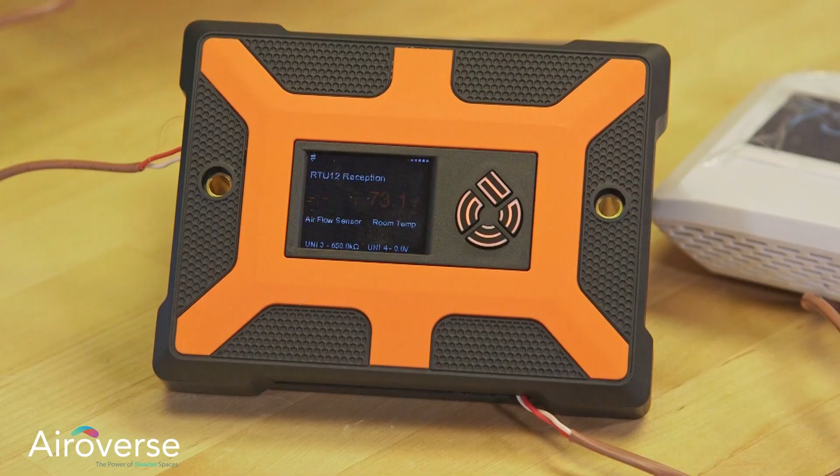So that's the Connect module. So you can test everything up on the roof before you go down in the space to check that the HyperSplit is powered up and get it paired up. So we're going to switch out here and we're going to move this over.

All right, so when we come down to the space, I've taken the corner off of this to make it more obvious, but there is a film on the front of every one of these HyperSplits or HyperStats, and it covers the full face of the stat. So if you put your finger there, when you're fully done with the install, you can peel all this film away, and it gives you a much nicer, cleaner look at the end of your install. And there's also a film on the touch slider here too. Some people leave that for a while until it starts to wear out, and it saves the touch slider a little bit longer.

Once I come in here, I've got a default screen that's showing me a few things. I've got a slider here that I can adjust up and down my desired temps. And it'll time out here in just a second, go back to the home screen. And I can also change my modes. So the fan mode button is really a fan and mode button. So I can change to auto mode, heat only, cool only directly from the stat. That can be locked out from the stat or in various ways.

And then what we're going to do is we're going to enter the installer menu operation by holding the plus and minus buttons for about 4 seconds. And from here, I can also see the inputs coming from this device, so I can make sure all my sensors are reading, that the paint didn't clog something up or something like that.

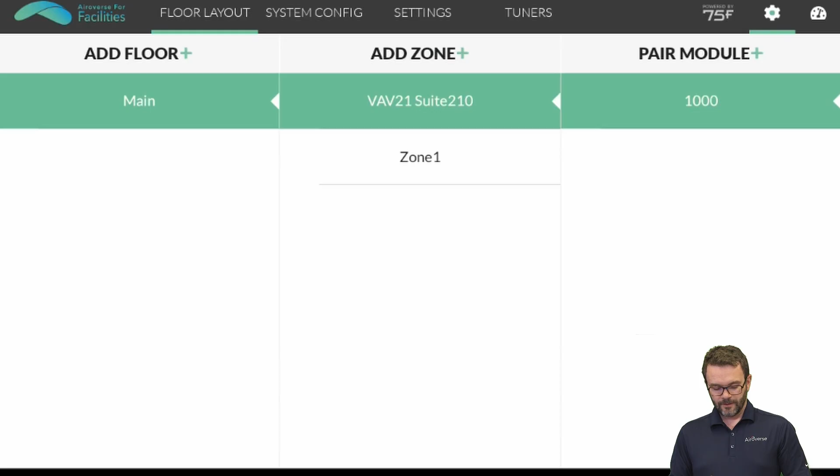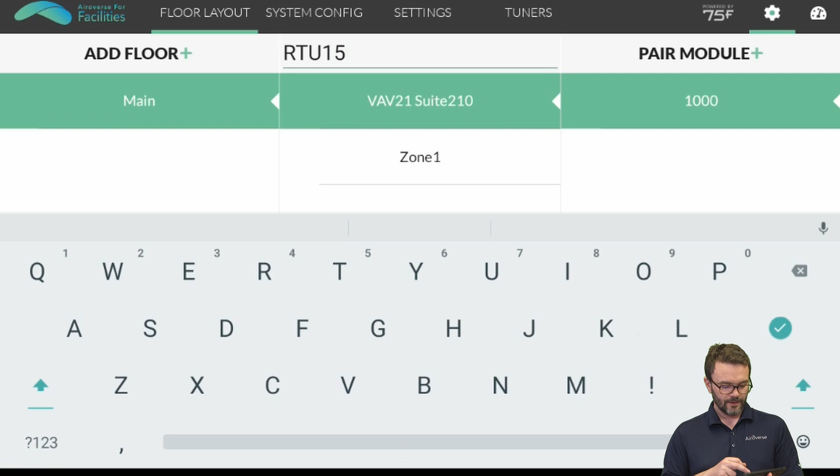So, back on the central control unit, I'm going to go ahead and add a new zone for this HyperStat Split, and I'm going to call it the reception area. So if it's in the reception area, I also want to call it which RTU it's controlling. So I'm going to say it's RTU 15, and we'll call it reception. Again, if you get in that naming convention habit, it'll save you a lot of time on the back end.

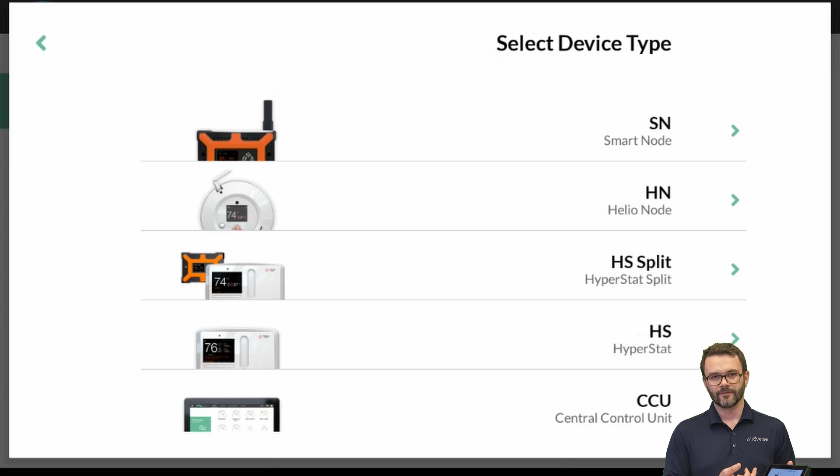And then what we're going to do is we're going to hit pair. And again, we're going to select which device we want to pair. We're pairing a HyperStat Split. There's only one major profile for the HyperStat Split right now, for conventional package unit with economizer. You can disable the economizer function if you want. And from here, it walks you through the steps to put the HyperSplit into pairing mode.

One thing I haven't mentioned yet is that the HyperSplit actually has the 900 megahertz antenna, so the antenna is down in the space. It's not up on the Connect module in the roof. So that makes your communication much more stable.

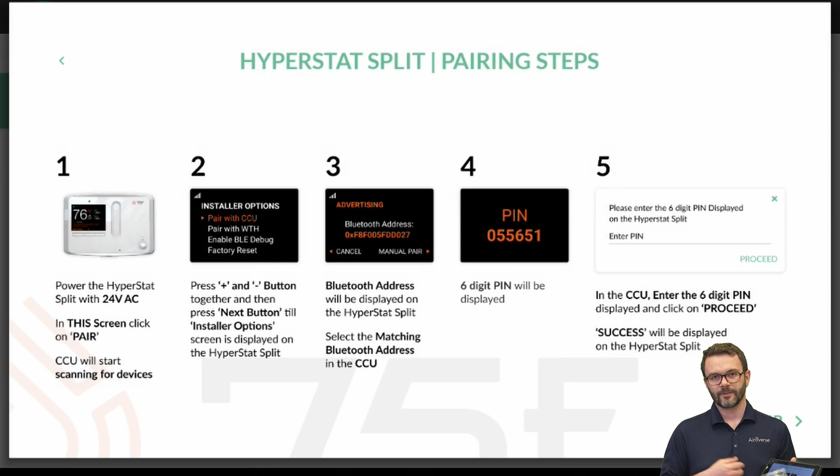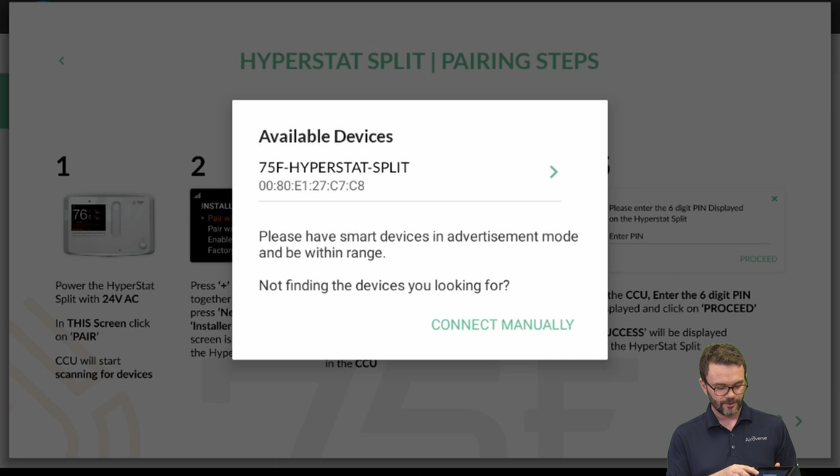So we'll go ahead and hit pair, and we're going to want to verify that our MAC address is C8. C8 it is. Don't choose connect manually. Connect manually is as if I'm trying to swap out devices without pairing. And then what we're going to do is type in the code. The 6-digit code verifies I chose the right one, 974701, and I hit pair. And just like that, I've successfully paired with the central control unit.

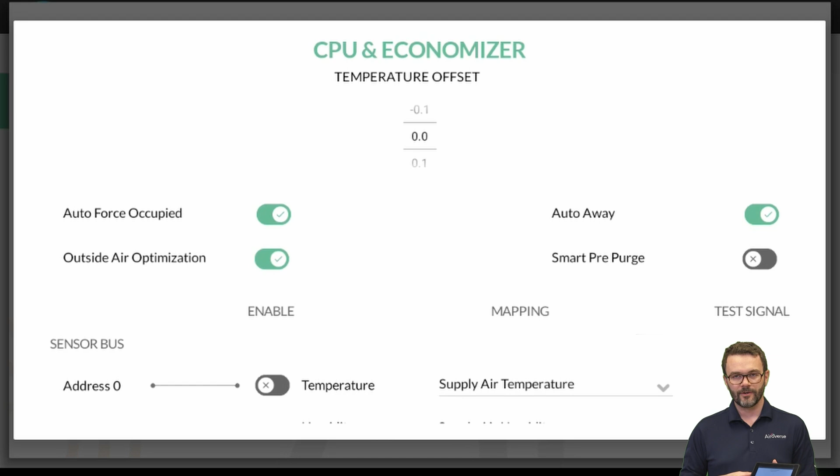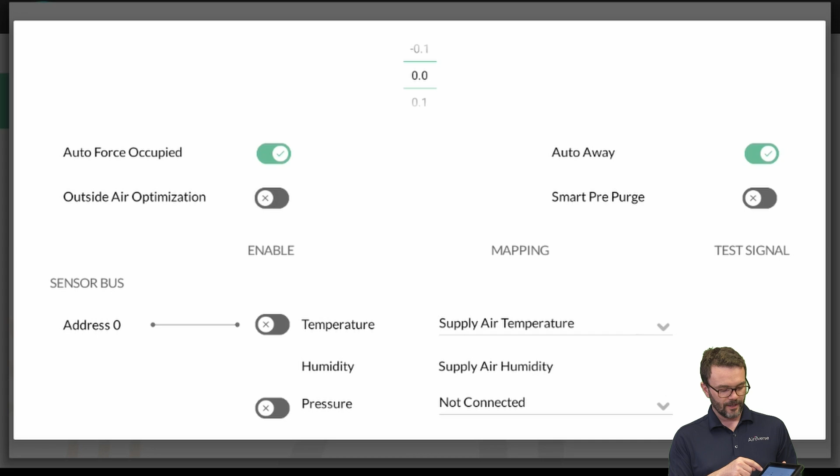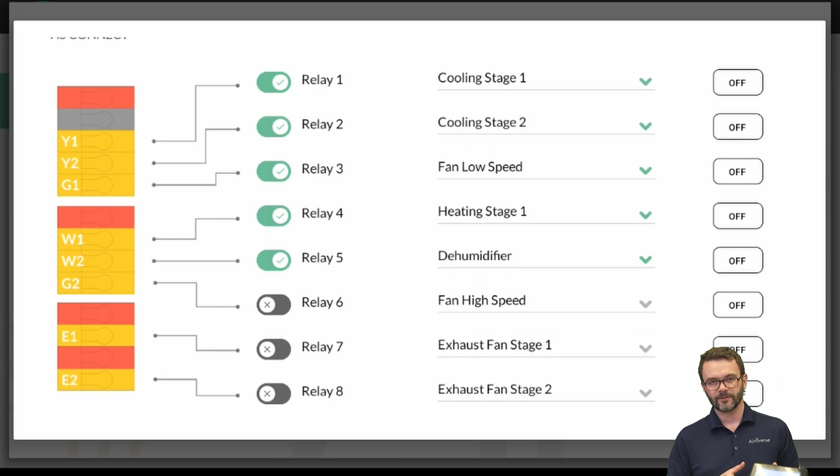And now what I do is I just select my options. So I can choose if I want to use the occupancy sensor. I can turn on and off my outside air optimization, which is the economizer function. I can scroll down, I can turn on sensor bus options, I can turn on which stages of equipment I'm going to control on the unit. I can change which stages of equipment, or if I want to use a dehumidifier on Relay 5, I can turn it into a dehumidifier using the onboard humidity value from the HyperSplit.

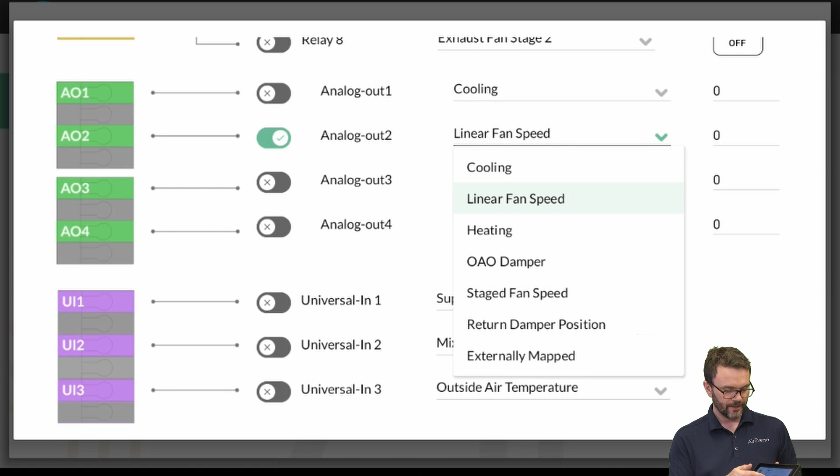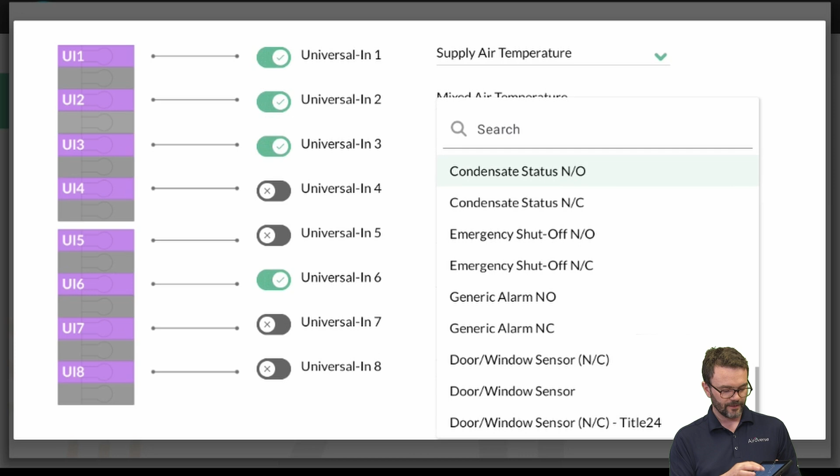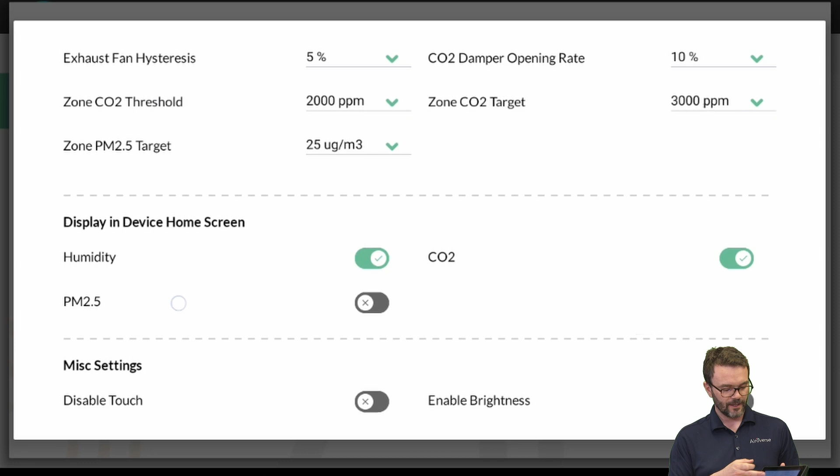If I want to do a staged VFD fan on here, linear fan speed would just scale with the load. I want to do it based on a staged fan speed like so. Scroll down, I can turn on some of my universal inputs, or I could reconfigure some of those inputs to be something like a generic alarm from something in the unit. Scroll down, there's more settings for how I control my VFD fan and other things. Again, you'll make yourself familiar with this as you go. But primarily the default options are going to work.

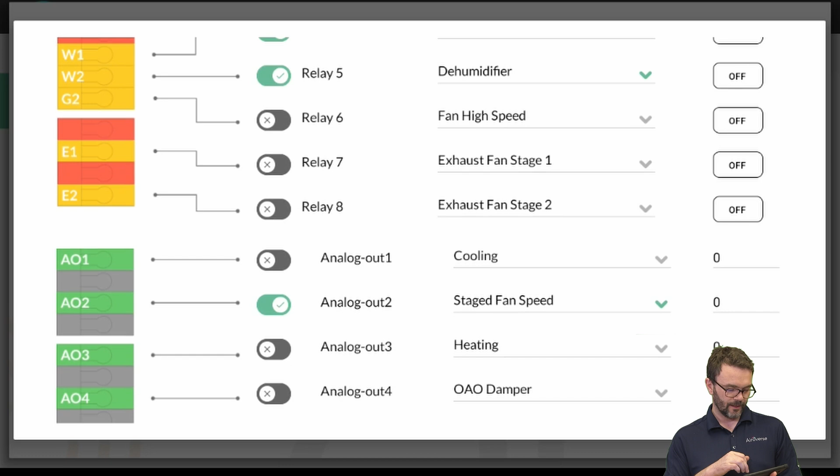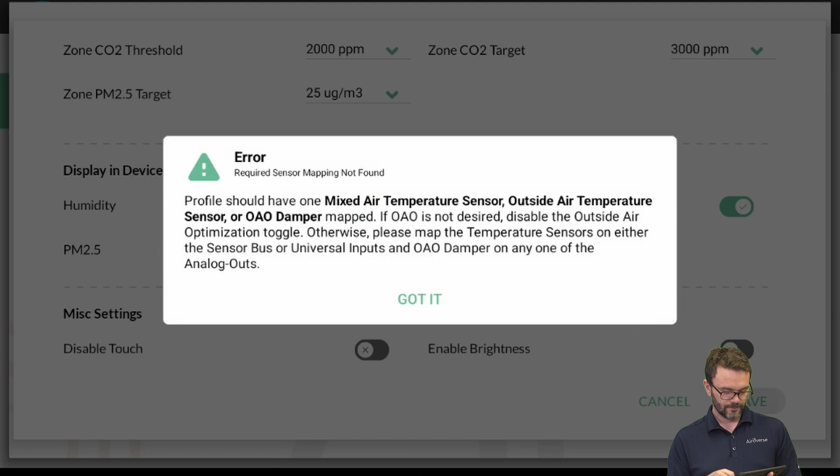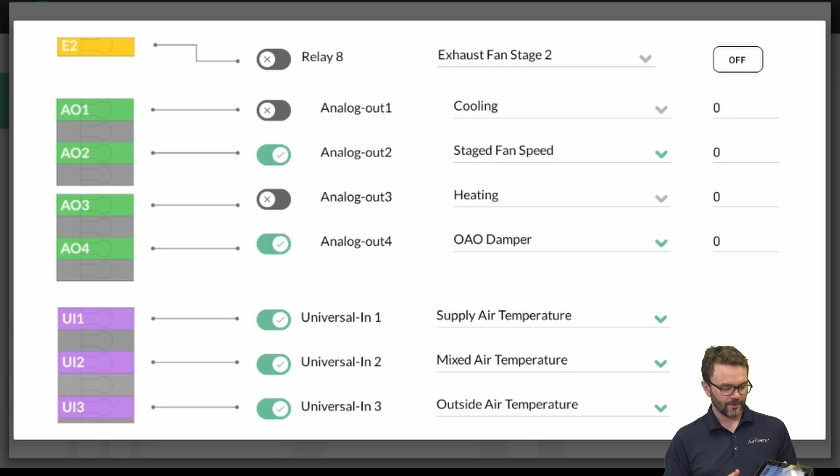Oops, and I enabled my OAO, which means I have to have a mixed air temp, which I had. I have to have my outside air damper, so it was letting me know I have an economizer enabled without my OAO damper. So that's important. That was a good catch by the software. And we hit save, and now it's assigned an address.

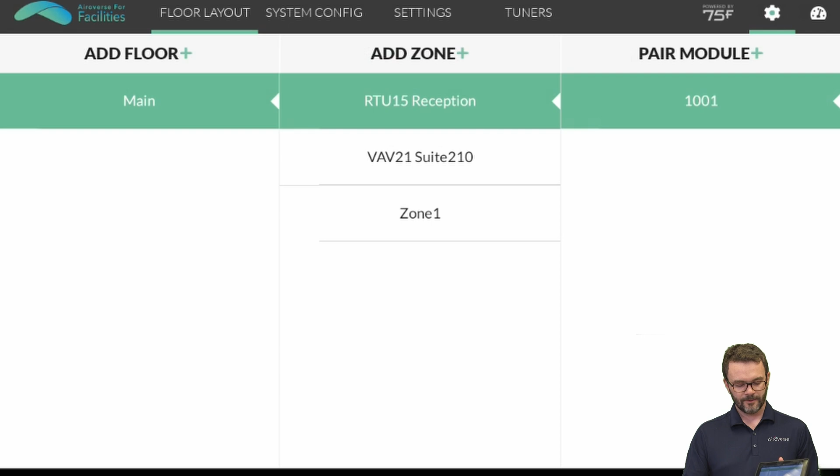And the device itself is saying waiting to connect. It will connect once I dock my tablet. But again, just like all the other devices, I can walk around, I can pair them all before I dock my tablet. Once I dock the tablet, that's when I can expect to start getting zone temperatures and all the data coming from this, and for the HyperStat Split to recognize what type of profile it's actually controlling. So with that, that's your HyperStat Split pairing and configuration.